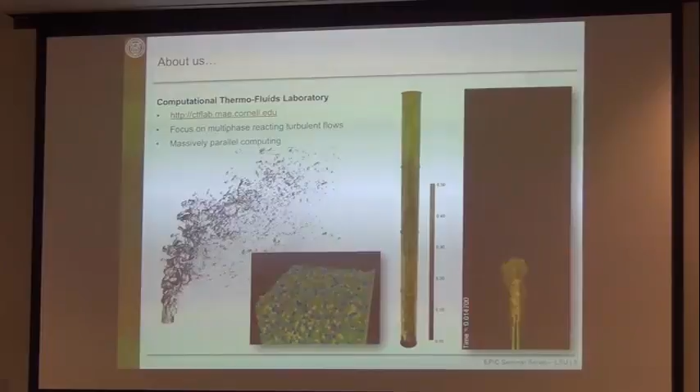A couple of things I'm not going to talk about: we do a lot of particle-laden flows. This movie, probably the most boring one, shows sand grains in water flow at the bottom of a pipe, and we're looking at the entrainment of the top of the sediment layer as the fluid moves. But we've also done a lot of work with cluster formation in risers, fluidized bed reactors, bubble formation, and things like that.

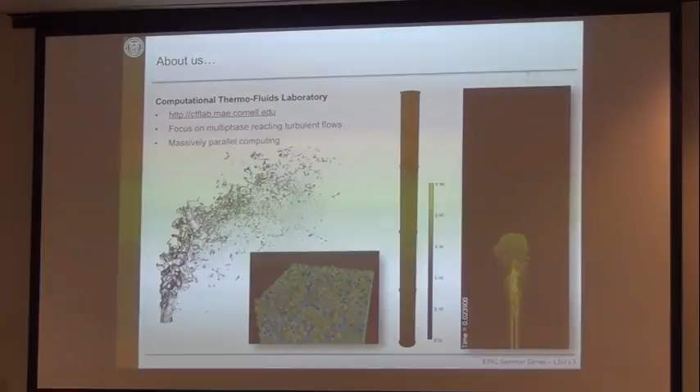This is another particle-laden flow model, even though here I'm not showing the particles. This is the riser reactor, so we're looking at two cases. In this tube, we're injecting gas at the bottom, and there are catalytic particles that are entrained with this pneumatic transport, being pushed up. When these particles encounter a certain type of biomass vapor, they convert it to another chemical species—this is called biomass vapor cracking. We're interested in looking at what happens in a system like this, where we simply have particles being pushed up by the flow, with gravity bringing them down and nothing else.

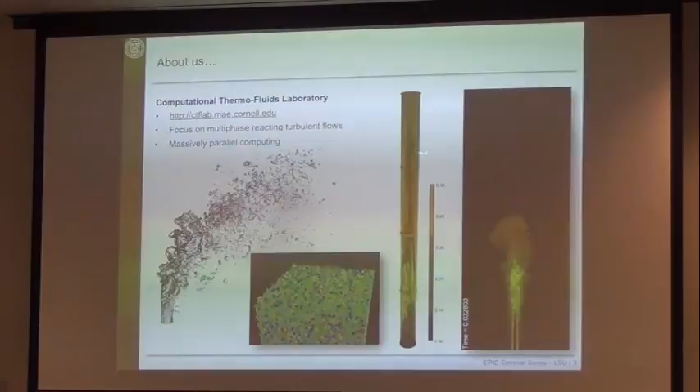What turns out is that particles tend to form clusters—they come together, form clumps, denser regions. They do that on their own; it's a spontaneous process. They start forming along the hydrodynamic boundary layers in the system, and that leads to strong instabilities, which in turn lead to very much non-trivial flows, as well as a fairly significant reduction in the conversion rates of that reactor.

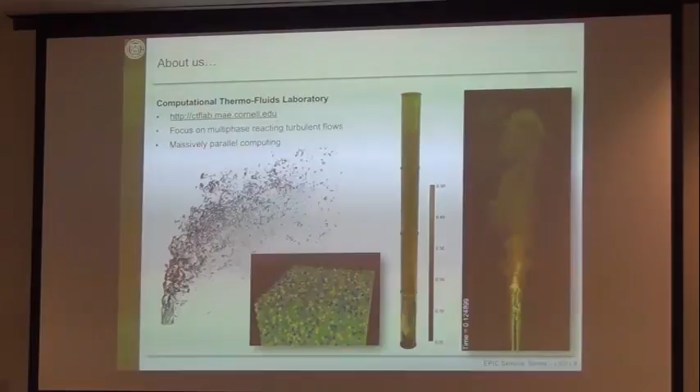And that's—we're looking here at a turbulent flame. This is a simulation of the so-called Sydney piloted jet burner. We're looking at fuel injected here in the middle; there's a pilot flame in an annular region around the jet, and then the oxidizer around it, and we're looking at the flame formations. This next thing I'm not talking about for now because we're going to cover it in a lot more detail—this is a liquid atomization process, where we're looking at a liquid jet breaking up into drops and foams.

So why are we interested in those things? Well, multiphase flows are everywhere. They're important for most industrial processes, anything that involves energy conversion, any type of conversion process, any type of manufacturing process. It's ubiquitous, it's everywhere. So that's something we need to understand.

Beyond engineering problems, it's also a very relevant process in environmental flows. For example, the turbulent two-phase flow in breaking waves is a limiting process for the rate of transfer of various quantities across the atmosphere and the ocean. If we want to model rain, we need to deal with a large collection of droplets moving in turbulent flow, coalescing, becoming large enough to eventually fall. This again is a turbulent two-phase flow process.

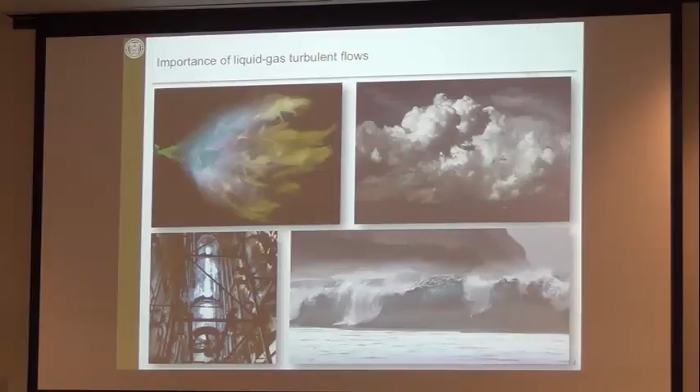So if we want to zoom in on one specific motivation, I'll use combustion as a relevant grand challenge. I'd argue that we want to improve combustion efficiency while lowering emissions, in a context where fuel flexibility is becoming more and more important.

I'm trying to illustrate this by the fact that the projected efficiency of cars all over the world is going up, while the consumption of fuel per 100 kilometers is going down everywhere, and that's driven by regulation as well as progress in understanding of systems.

At the same time, we're actively exploring alternative ways of generating usable liquid fuels. We're interested in looking at how we can convert different types of biomass products, including algae and corn stover, into a usable liquid fuel that we can then burn in our engine.

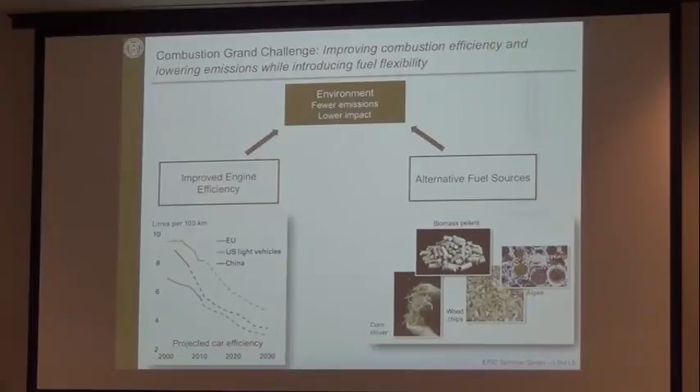All right, let's consider this a bit more. By the way, this image comes from Moin's group at Stanford. When I started my PhD, I was working on doing a large eddy simulation of that flame, so I've stayed with that image for a while, and it's been ingrained in my brain.

I'd argue that if you want to work on combustion and have a positive impact on combustion processes, at least part of the key is in the liquid-gas interaction, in the liquid atomization process. So fuel injection is critical to the system.

We have a big recirculation region here. There's a region with the flow actually going back inside. This is a very complex flow pattern - heavy, turbulent, highly multi-scale.

But it turns out we have some decent understanding of the combustion process here - we have okay models of the turbulent combustion process. When I started my PhD and ran simulations of that, I realized I could get pretty much any answer I wanted in terms of one metric: the temperature at the exit. Why is it important? Well, if the temperature is too high, we're going to burn the turbine blades, and we're not going to have a working engine.

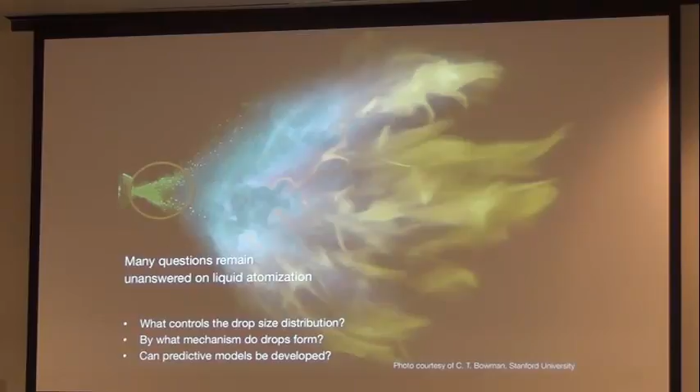If we don't know the drop size, we don't know the drop velocity, we don't know the drop distribution. We don't know how the combustion process will look, what type of soot we're going to form, or the efficiency of the system. We essentially don't know anything.

Alright, so hopefully I've convinced you that it's important to improve the way we model multi-phase processes. I'll argue, however, that this is a challenging task, and I'll make a few arguments for that.

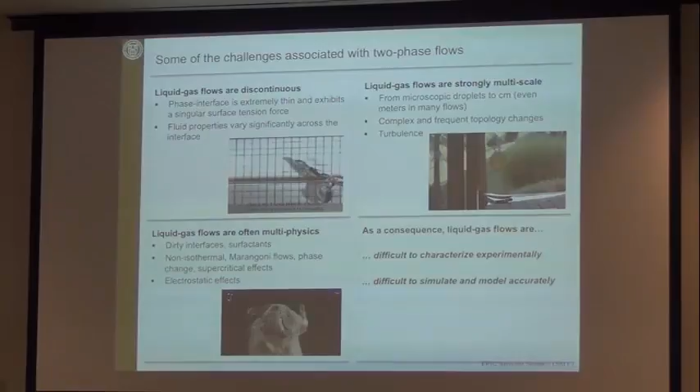One is that a liquid-gas flow is discontinuous in nature. Within our computational domain, from a computational perspective, we have to deal with an interface representing a discontinuity between the two phases. That interface is extremely thin, and for all intents and purposes of engineering flows, it's a discontinuity in our system—infinitely thin.

It leads to a surface tension force, so we have a singular force existing at the discontinuous interface, and we have to deal with density ratios across that interface of the order of 1,000. That means the stuff on one side is much heavier than the stuff on the other, and it can induce very large flows from just very minor motion.

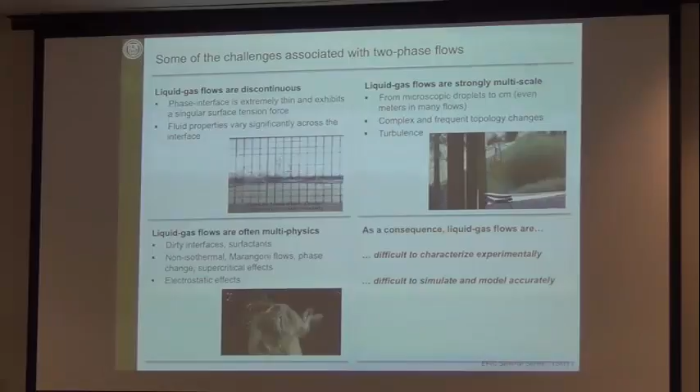We're going to have to deal with significant pressure variations when we move our liquid around.

This guy here isn't really using surface tension—it's more the difference in density. That's surface tension elsewhere. But on that scale, surface tension isn't really helping this guy float much. It's really just inertial forces that are helping.

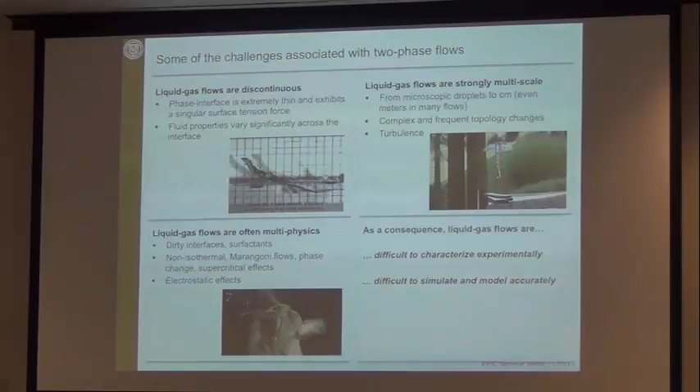For example, here we're looking at a weird configuration: one balloon creating a backward jet that forms a cool-looking helicoidal instability, which leads to a mushroom shape at the top that inflates into a little bag, undergoing bag breakup. You can imagine going from this large-scale jet coming out of that one balloon to incredibly tiny droplets, just from breaking the inflated film like that.

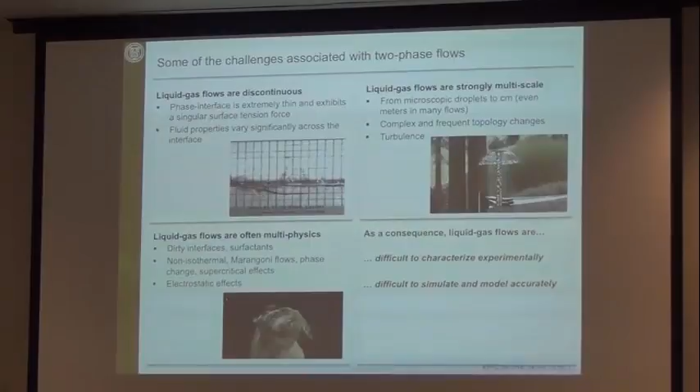This is going to be an extremely challenging problem to model, and all this is happening in a turbulent environment, which also naturally leads to many scales. Finally, another aspect is that we typically have multi-physics types of environments—so we have multi-scale, multiple phases, but also multiple types of physics.

For example, you might have to deal with dirty interfaces, the presence of surfactants. I guess this was meant to be a simplification of dirty interfaces.

We might have to deal with non-isothermal processes, Marangoni flows, phase change or supercritical effects. And one thing we'll talk about very soon is electrostatic effects. So we might have additional physics at play.

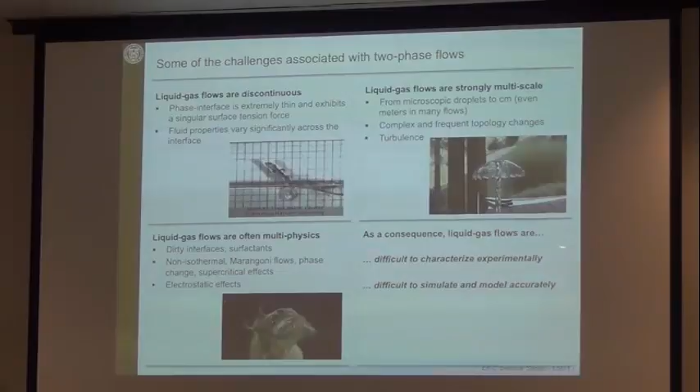As a result of all this, it's difficult to run experiments on these liquid-gas flows, especially when optimizing them. They're also difficult to model accurately.

I would argue, however, that we have the opportunity to use the growing computational resources available to us to brute force our way through this problem and use computation as a discovery tool. If we run large enough simulations, we can generate data that helps us understand what controls, what aspects of this flow are critical.

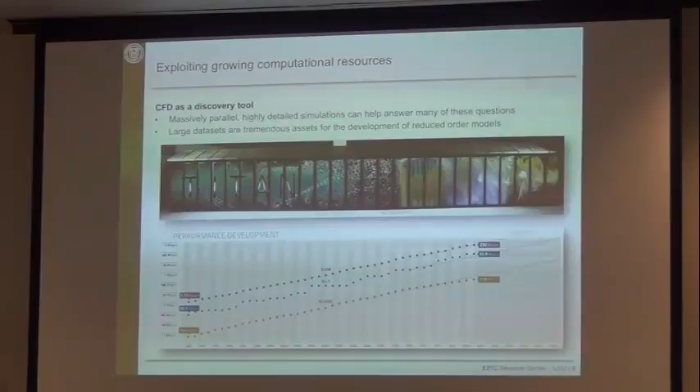We're getting to the point where it's conceivable to say, hey, well, we know the equations, we know we have these discontinuities, we know the parameters of the two fluids. Let's just solve everything. We have this chance where we actually have a complete mathematical representation of the problem at hand. Let's just come up with a solution computationally and see what we can learn from it.

And I would argue that from data sets generated in that spirit, we can help guide the development of reduced order models that could then be used in generating design data. I think this is relevant to...

Processing data. All right, so in terms of methodology, there's a lot to be said, and I had to make some choices. I thought you might not be interested in seeing too much numerics on a Friday afternoon, but I'm sorry, I'm going to still show you some numerics. So you have to be patient.

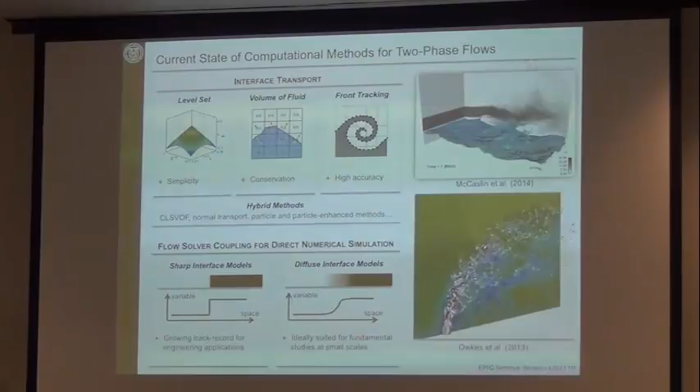But I decided to focus on one aspect that I think is kind of cool. It works out in a fairly neat way and doesn't necessarily require too much time to explain. So I'm going to focus on that and kind of ignore the rest. That's the slide where I provide a bit of context and talk a bit about the rest.

Simulating two-phase flows is something that's been around for a while. We have many methods and codes out there to do computational fluid dynamics, but most of them have been focused on single-phase flows. We want to augment that with what's necessary to deal with the presence of interfaces. I would argue there are really two key components that need to be handled.

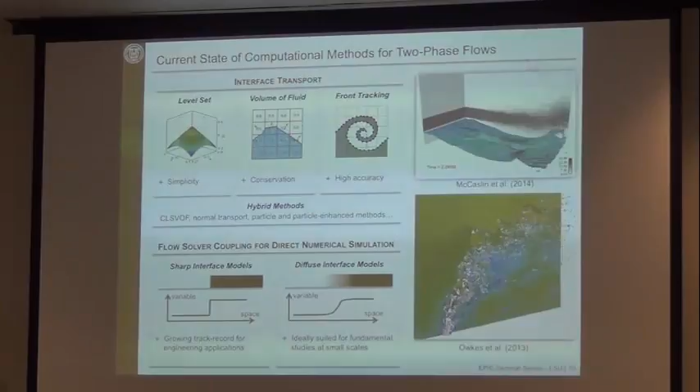One is that we need to figure out the location of the liquid-gas interface, so we need some methodology for keeping track of where we go from one phase to another. There are different methods for that. I would argue that probably the three most commonly found are what we call the level set method, the volume of fluid method, and the front tracking method.

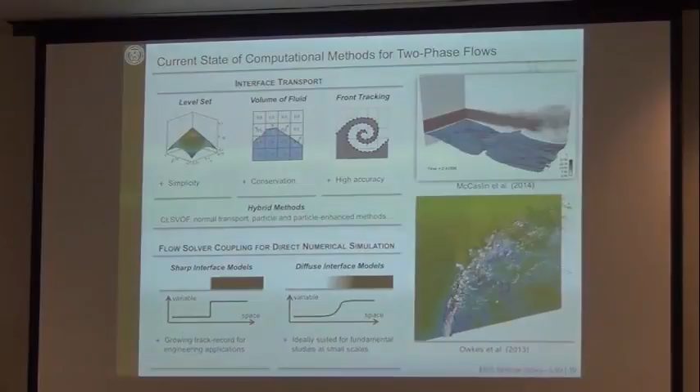The level set method introduces an auxiliary scalar field, defined such that one of its isosurfaces coincides with the interface. Then we transport that field such that the interface still coincides with that isosurface. So we're using this auxiliary function as a pure mathematical tool to help us track it.

It's a very neat method. It works really well. It's simple, at least conceptually it's simple, and in terms of implementation it's simple. It has limitations, but I decided not to focus on what I think are the limitations, because depending on what problem is of interest to you, what might seem like a limitation to me might not be a limitation to you. So I thought I would focus on what I think are the best advantages of the methods.

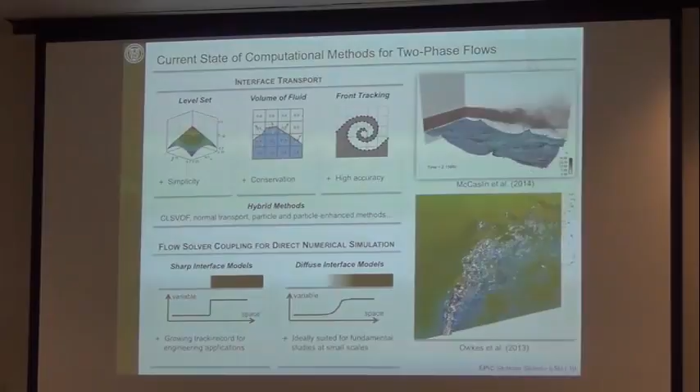You can see that I've tried to claim that this one method was not good, and I had someone in the audience who was very important and had written a paper on that, and told me that's not good. So this is, you know, from experience. I'll only focus on the positive aspects. So level set is a simple method to pick up and implement, and it works well.

Volume of fluid: the idea is you're going to keep track within each cell of how much liquid is contained in that cell. So you're going to compute what is the fraction of the cell that's contained in liquid. It might be 1 if it's 100%, 0 if it's 0%, and 0.5 if you have half your cell full of liquid.

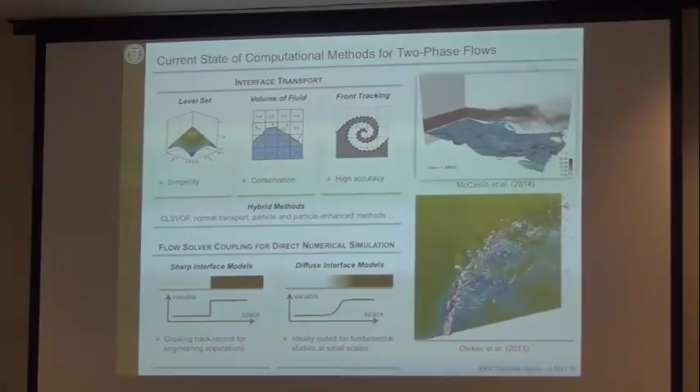The main advantage that I see in that method, in addition to the fact that it works well, is that it's naturally a method that will give you conservation. So you'll be able to write something that, strictly speaking, will conserve the amount of liquid you have. If you have a drop, you can move it around, and you're not going to see this drop shrink or grow.

Front tracking corresponds to kind of a more natural approach where you would say, I'm solving my flow equations on a mesh—typically that's what we do. Let's just introduce an additional mesh to keep track of where the liquid gas is. So we'll have a mesh on our surface and deform that mesh to keep track of where it is. It tends to be very accurate.

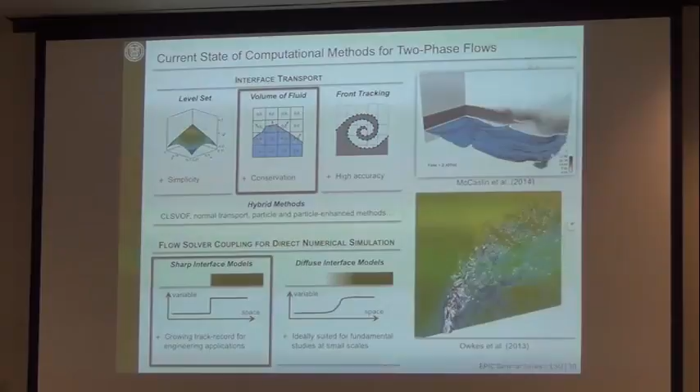So that's one aspect. For this, I'll say that we'll focus here on volume of fluid. We've done a lot of work on level sets as well. I haven't really done too much in front tracking, but here we'll talk about it.

To me, the second aspect is that we need some way of telling a flow solver that there is an interface at a certain location, and that interface leads to a discontinuous density, discontinuous viscosity, discontinuous pressure, etc. So we need some way of telling our flow solver that it's actually solving two different equations across interfaces.

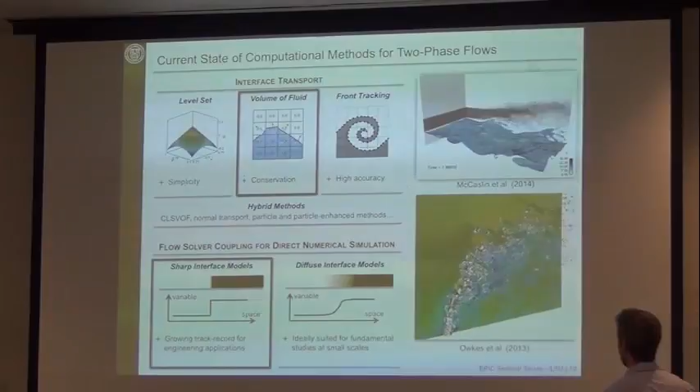A lot of people, maybe 20 years ago, were really focusing on: diffuse interface models, where we have a smooth transition from one phase to the other, which is an acceptable approach provided you can say something small about what this diffuse region means, knowing that the two phases are typically immiscible. More recently, we've seen sharp interface models being proposed where we have true discontinuities within our flow. And here, this is what we're going to focus on.

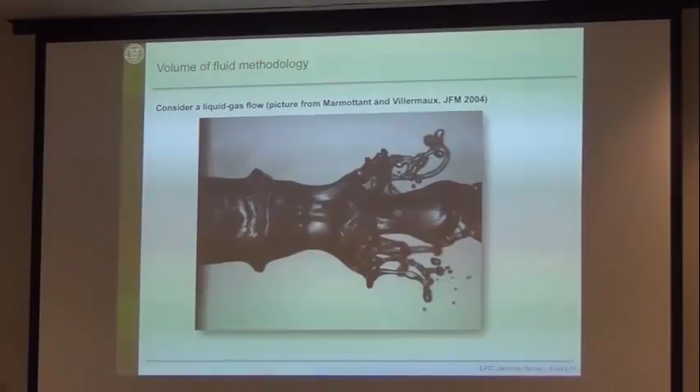All right, so I thought we should start, since I'm going to show you a little bit of numerics, from the very basic idea to make sure that everyone follows.

We're going to start with a really cool looking image of a liquid gas flow. That's probably one of the most well-known images of an atomization process out there. This was published 12 years ago, coming from France, from a guy called Philippe Marmottant, who spent his PhD taking really cool pictures like that.

So this shows a liquid water flow. It's a round jet going from left to right. And around it, there's a very thin annular co-flow of gas that's fairly high speed in comparison. So this is moving slowly, and around it, as you can see, there's an airflow that's pretty fast.

This leads to the development of a streamwise instability that, for those of you who are well versed in fluid mechanics, we'd say is a Kelvin-Helmholtz type instability. After that, we end up developing radial instability. So you see the development of those ligaments and this crest becomes uneven.

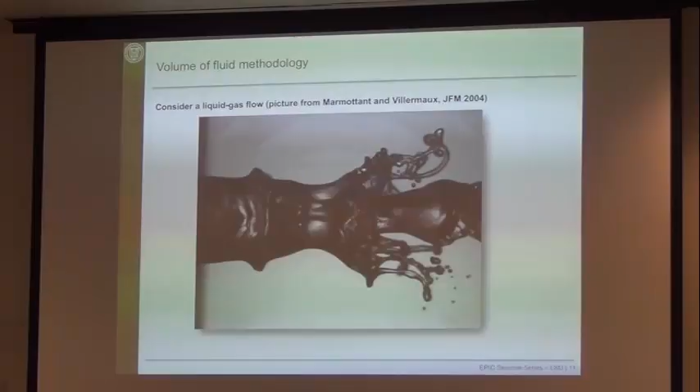This other picture from the side I didn't show. This is due to radial instability, and then you start pulling ligaments because they have to surround the gas flow. And those break due to a Rayleigh-Plateau instability. But that's just a very pretty picture.

Let's make it good. So if we have in our computational domain a region that's liquid and a region that's gas, we're going to simply define the liquid distribution function, the function that tells us an indication of whether we're liquid or gas. That's simply a function that's a Heaviside type distribution.

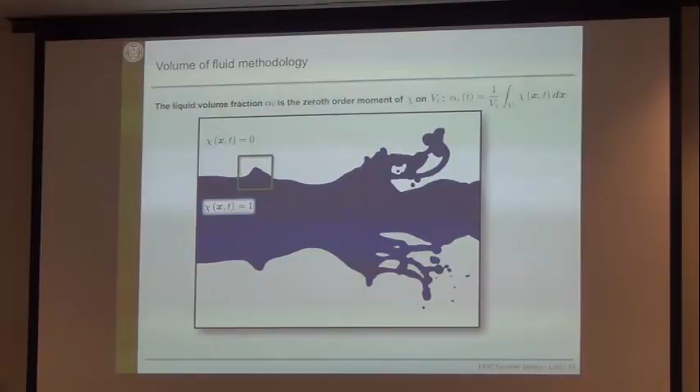That's not something that's very convenient for us to use because it's a distribution—not convenient as a smooth function to work with. So we're going to say that if we have a computational cell here, we acknowledge the fact that it contains a region that's gas and a region that's liquid, and we're going to simply worry about the zeroth-order moment of that distribution function within that cell. So we're going to simply volume average it over our computational cell.

And we're going to call that alpha in cell i at time t. And we're going to say that this is simply our liquid volume fraction. So that's the volume average of this liquid distribution function.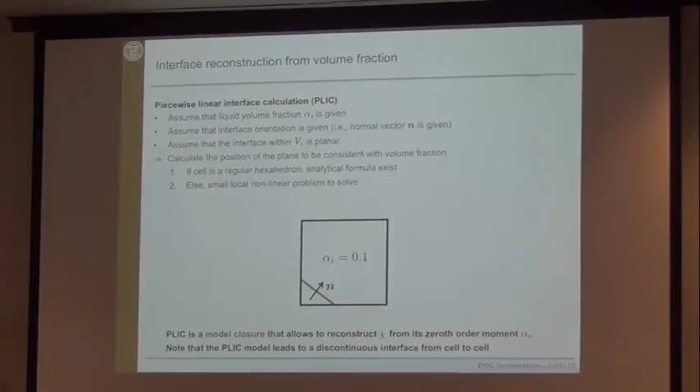Now, from that information, you might say, haven't we given up a lot? And yes, we've given up pretty much all knowledge of the distribution of liquid, except on a cell-to-cell basis. But within the cell, we've lost all the information. So we're going to need to make an attempt at recovering some of that information.

So this takes the form of what we call a piecewise linear interface calculation. This was proposed a number of years ago. I'm just presenting other people's work here.

The idea is we're going to assume, in a cell, that we've obtained from the solution of our equation how much liquid we have. And in addition, and that's kind of a stretch—I'm skipping a number of things there—assume you also know the orientation of the interface. That's a tricky question.

But I'll argue it's possible to obtain an idea of the interface orientation if you have enough information about the volume fraction in the surrounding area around the cell. So, looking at the volume fraction and normal orientation, we'll assume the interface within our cell is planar. From that, it's sufficient to solve this as a purely geometric problem: we compute where this interface should be located such that it is perpendicular to this normal vector and such that the volume under this interface integrates to the correct fraction of the total volume available.

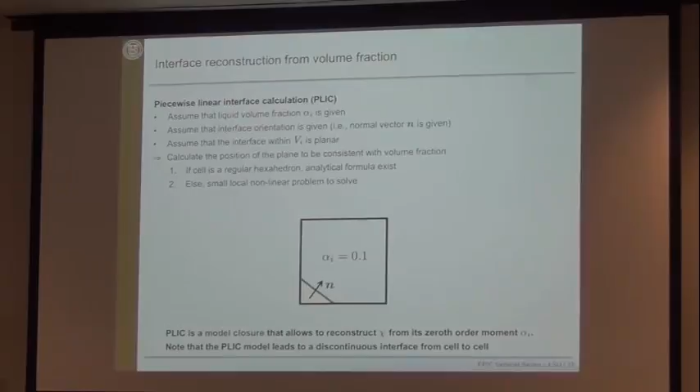That's easy to do, and it's analytical if you're working with an exact, simple cell. If you're working with a computational cell that's more complex, it's not analytical—it's more complicated—but it's still a nonlinear problem that's very small, and we can solve it iteratively to obtain a solution.

So you can think of this as a model closure that allows us, within this cell, to take the zero-order moment information—our volume fraction field alpha—and reconstruct from it the internal distribution of the interface. The big issue is that this representation, in the form of a little chunk of line, is discontinuous. From cell to cell we have these little chunks that don't nicely connect.

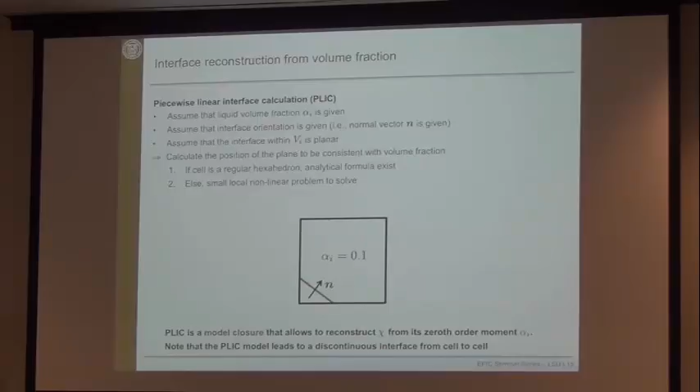How do you transport a volume fraction? Well, it turns out a volume fraction is a discontinuous quantity, and transporting a discontinuous quantity is problematic. If we just use naive methods, some kind of simple scheme, we'll diffuse it out and won't maintain this discontinuous nature—we'll end up with a bunch of cells where we don't know how much liquid or gas we have, just some mixture of both.

If we use a high-order scheme, we can maintain the discontinuous nature a lot better, but then we'll overshoot and undershoot, creating regions with more than 100% liquid or less than 0% liquid, which isn't convenient. So instead we propose an alternative, geometric in nature approach. First, I'll recast the problem as a simple advection problem.

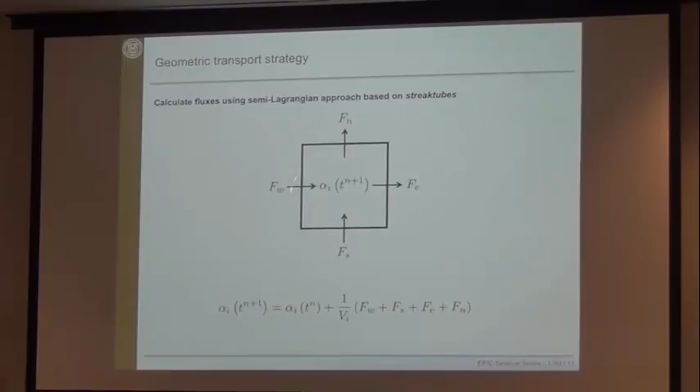Let's say I want to know what alpha is in that cell at time t plus 1. I'd argue I simply need to figure out how much is fluxing in and out of each cell. Then I can obtain the new volume fraction from the knowledge of the old volume fraction and how much liquid has left or entered the cell.

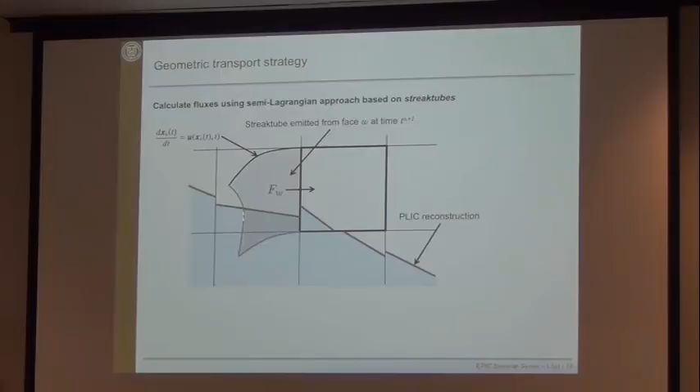So we'll take a cell, take the cell face, and in a geometric sense emit what we call a streak tube. We take that face and move it back in time to where, in a Lagrangian sense, if it were a fluid particle, it would have been in the past, such that this line over our time step deforms into that straight line.

So I've created a flux tube that corresponds to the volume swept by fluid molecules crossing that cell face during the time step. Now that I have this tube, the other thing I need is to figure out how much liquid is in it, which I can compute because I have a PLIC reconstruction of the interface. If I know how much liquid is in that tube, I know exactly how much liquid is entering through that face.

So that's the equation we're going to follow—the equation followed by this little point is just a pure Lagrangian equation. I'm taking that point and moving it back in time according to the flow velocity. So that's the step we need to do. And how do I generate the geometry of this?

Well, it turns out this is not a particularly new idea—people have been looking at this for a while. It started 40 years ago.

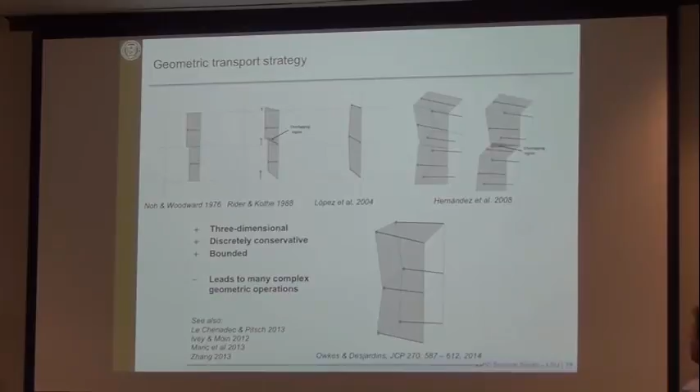Where people said, well, if we can get a 1D approximation of our streak tube, that would be great. So they just took their face and moved it back in time in the direction normal to the face, and looked at the volume swept and how much liquid was in the tube. That was easy to implement.

It worked terribly. People then realized we need to account for the fact that the flow doesn't go normally through the face—it actually has an angle, going in whatever direction the flow is going. So they accounted for the fact that those volumes had to be inclined, but then generated this in a way that neighboring streak tubes could overlap.

If you're overlapping streak tubes, you end up with a region of the flow that gets fluxed twice—once above through the face at the top, once below through the face at the bottom. You're not going to be conservative if you do that. That doesn't work well either.

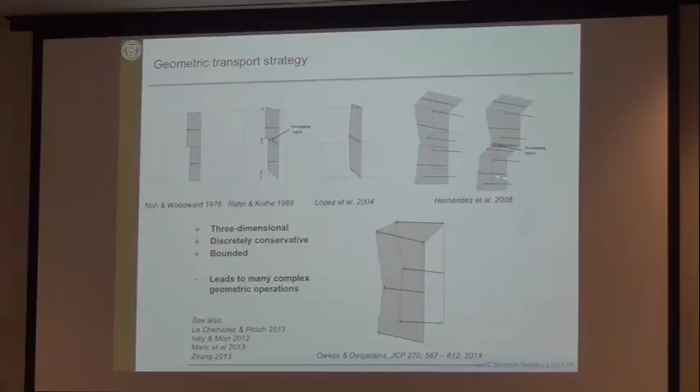People realized that and fixed it in 2D. Then they said, all right, we're going to need to fix that to plug that in 3D. And we realized, well, it's complicated—so we'll now get some overlap between streak tubes that are connected through their corners. So again, this is not preserved.

So what Mark a few years ago did was say, well, let's just wipe the slate. Let's simply take our cell vertices and those corner points and make sure they move consistently, no matter what streak tube they're part of. They need to essentially remap those cell faces into, in a Lagrangian sense, what they would have looked like in the past had they been an actual material fluid surface.

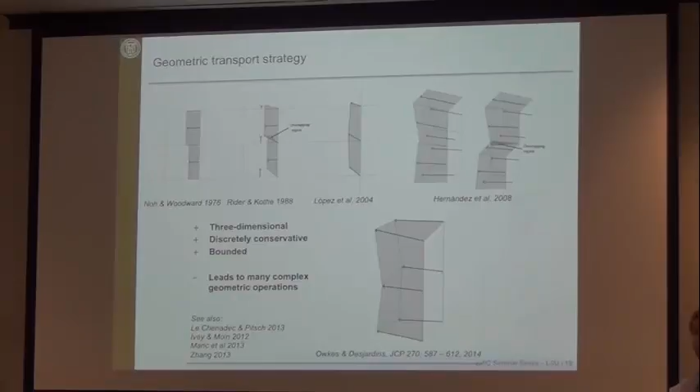And then that's going to give us our usable stream tube. In 3D, that can be made discretely conservative—I would argue it is not inherently discretely conservative, but it can be modified to be so. It also has the advantage of being bounded, so we'll never get more than 100% liquid or less than 0% liquid. So it has a number of advantages, but it's pretty complicated.

Why is that? Well, here's a naive idea of what this would look like. You just take this space and bring it back in time, and it looks almost like a cube—everything is easy. But in real life, this point could be moving to the right, this point to the left, this point to the left, this point to the right, such that this might be the shape the stream tube takes. You'll have crossed geometries and negative volumes, and it's going to be a mess.

So we need a way of dealing with it. It turns out that's not particularly complicated, so I'll just focus on one example to show you this. If we stick to 2D, and I label my face AB, let's say the generated stream tube in this very simple configuration is ABCD.

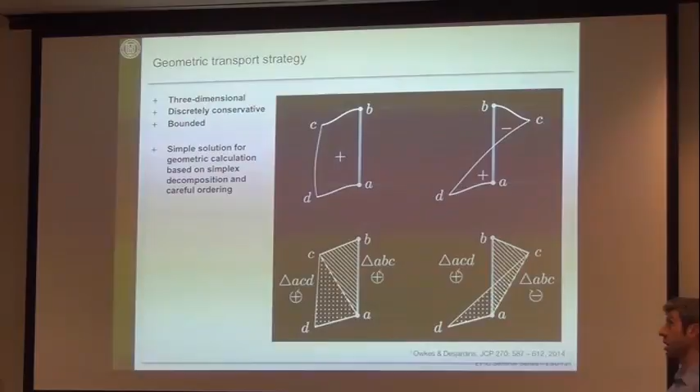We're just going to do two things. First, we're going to break it—we'll assume all lines are straight lines, dealing with a purely linear representation of all that, which should give us second order accuracy. In addition, we're going to deal only with simplices. A simplex in 2D is a triangle, so we'll represent our stream tube as a collection of triangles. Those are the constraints we're giving ourselves: straight lines, triangles.

So that's good. Now if we go to that configuration where C has moved to the right and D to the left, that's the configuration we get. A,B,C, according to the right-hand rule, is now a negative object. A,C,D is still a positive object, and it appears to double count this region that should not be part of our fluxing volume, yet it's covered by both triangles—once with a plus, once with a minus.

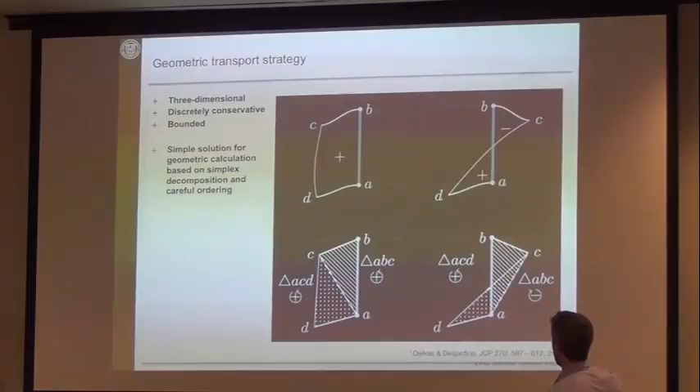We're double counting, but canceling those errors, we end up with a very simple representation that lets us say that the part limited by this line has moved with a minus sign—going to the left of the face—and the part here is assigned a plus sign, going to the right. We've successfully, with second order accuracy, dealt with a representation of flow in and out and simultaneous flow of events.

Quick clarification: these schemes, are you storing the velocities at the corner points? We are bringing our velocities to the corner points, but the scheme we use is staggered. We have velocity at the faces, the center of the faces. That's typically where we store it, but through interpolation we can bring it to the corners. We're going after second order accuracy and conservation, so interpolation is not an issue. The interpolated velocity is what's used in the calculation of the stream tubes.

I would argue that this looks like a simple example. It turns out this idea of taking a complex arbitrary stream tube, breaking it into simplices—in 3D that would be tetrahedra—and then specifying a unique, well-chosen order for the points to define the sign for those objects, is sufficient to deal with all possible complex, overlapping, crossing geometries. That's what we've done, and the conclusion is that it works well. I'm not going to use that too much.

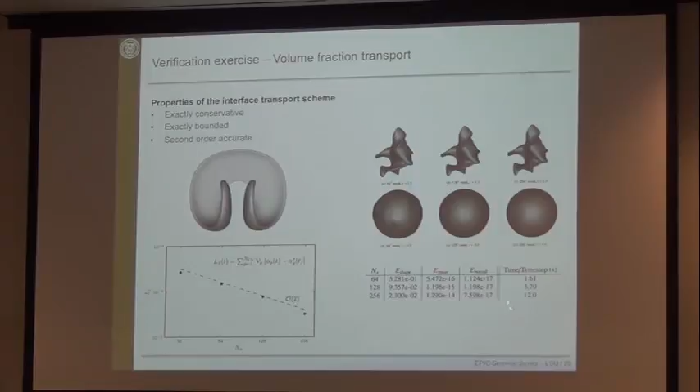I won't go into much more detail with the scheme, but once you've created that, you know how much liquid you have at the beginning of the time step, how much you have at the end, and how much went through each face. You can combine this to build a conservative transport scheme for any other quantity that's discontinuous because of the presence of the interface. So you can transport momentum of the fluid, which is discontinuous, in the same way. You can transport a scalar that only exists in the liquid, not in the gas—a concentration of something in the liquid—in a way that's conservative, even though your mesh is being cut arbitrarily. You can be second order accurate and conservative for any other type of transport.

Here's an example that's a fully chosen representation of that. This is a circle being transported in a domain, and we're tying a scalar to that circle, assigning it a Gaussian distribution. So we have a scalar field that's a Gaussian being moved around and diffusing as well, as we move the circle. We have an exact solution for it, and this is again another conservation test.

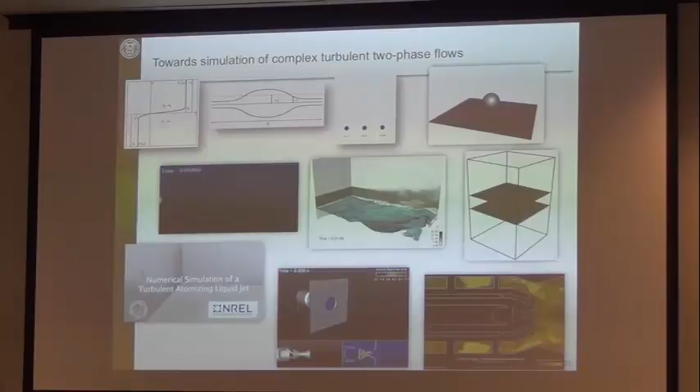So this is usually where the computer practice... let's see if it makes it through. Yeah, all right.

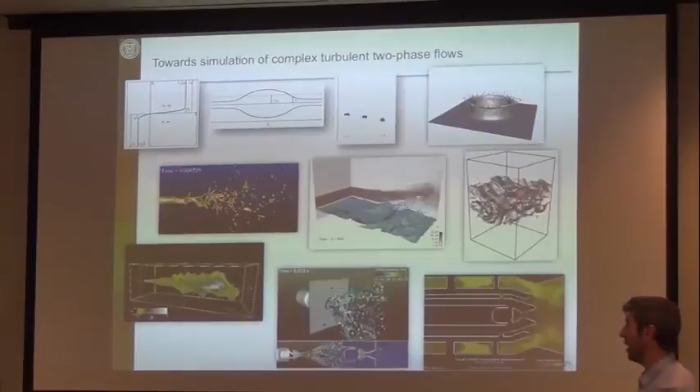We've used this to study a number of configurations, organized here by increasing complexity. We've looked at a simple velocity shear interface, various instabilities and the formation and breakup of ligaments, rising bubbles, milk crown formation, and the turbulent planar jet. This is an air-liquid configuration, where a liquid layer is being atomized by a high-speed gas flow running on top of it.

The timing for this one is good—we've looked at the simple round jet of liquid into quiescent gas. This is probably one of the biggest simulations we've ever done, a couple of billion cells run on 12,000 cores. So we've looked at the atomization process of this.

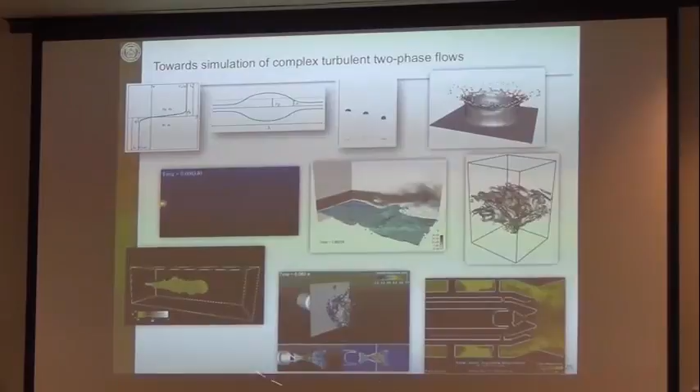We've added to these ideas embedded boundaries so we could look at a complex injector. Here we're looking at a swirl atomizer, where you get the formation of an air core in the center of the swirl atomizer—liquid is spinning and gas is re-entering from the middle. Then we went all the way up to a realistic General Electric injector, shown here. I don't even think you can see the interface in this, but there's also a pressure swirl injector.

Okay, very good question. Breakup is inherently modeled through opportune numerical errors, that's the truth of it. When we don't have enough resolution, we see topology changes because our representation is based on figuring out how much liquid is contained in our cells. This is volume of fluid, and so I would argue that the piecewise interface reconstruction that assumes we have a single plane interface in each cell is our breakup model.

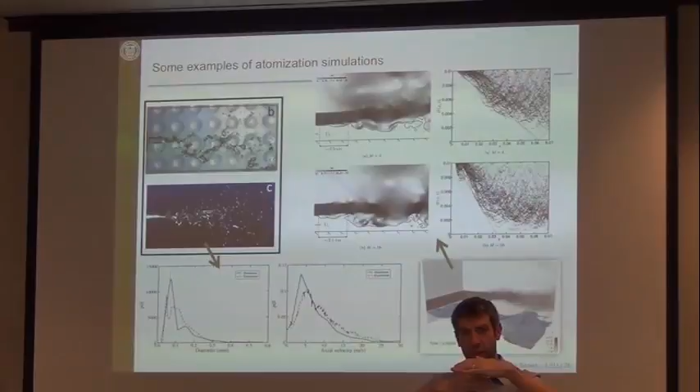If we don't have enough liquid and our normal is poorly calculated, imagine if I have two interfaces that come close together - the reconstruction is simply wrong. We should have two interfaces represented in the cell. We don't do that. Instead, we typically put a single one, and we'll put it perpendicular.

This very complex, weird-looking balloon that was breaking into this umbrella-shaped thing - those technologies are going to be very poor at simulating it. So it works for 3D, but it doesn't actually work for 2D.

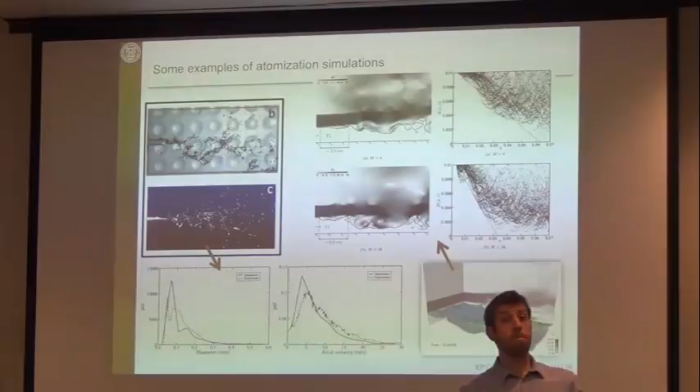Yeah, 2D is problematic because 2D doesn't have an inherent process that accelerates the breakup. If you have a 3D ligament, pulling of that ligament will give rise to the so-called Rayleigh-Plateau instability that will exponentially increase the rate at which the liquid is being pulled. As a result, it doesn't really matter how much we resolve, we'll get the same answer. Past a certain level of resolution, our breakup process becomes independent of resolution. Because of that, we can break up a ligament with reasonable confidence, but we can't really break up a film with confidence.

That's really an excellent question. There's still a lot of work that would have to be performed to deal with film draining. Not a lot of people have looked at how to model that in the context of those types of simulations.

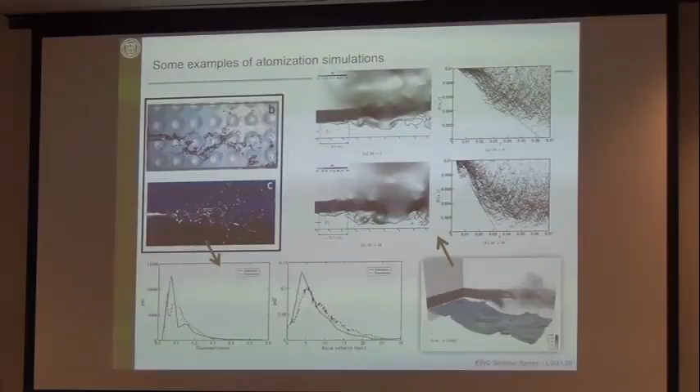All right, so let me skip some of that. This is some example of validation. We've looked at historical data for some of those simulations - hopefully you can see that qualitatively those things look very similar. We've looked at drop size distributions, we've looked at penetration. We have looked at very relevant flows for a different purpose.

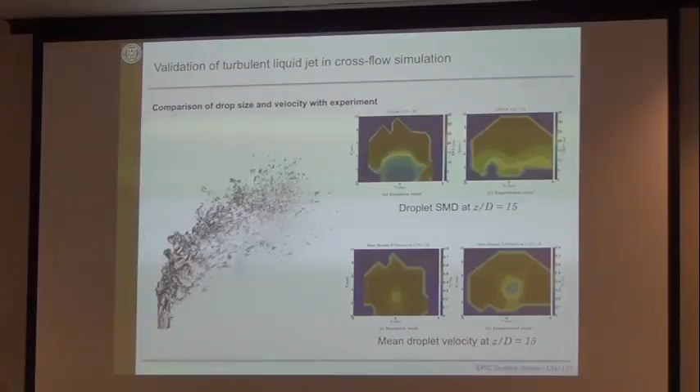And that is the case of the liquid jet in cross flow. Here we have a cross flow going from left to right, and we're injecting liquid into the system. The liquid is bending, breaking, forming wing drops. We've compared, at 15 diameters here, the drop velocity as well as the so-called SMD, Sauter mean diameter, a measure of the mean diameter. As you can see, it works - it's not perfect, but there's also a lot of uncertainty with experimental data, so we're kind of happy to simply be on the same color scheme. We're excited to see that.

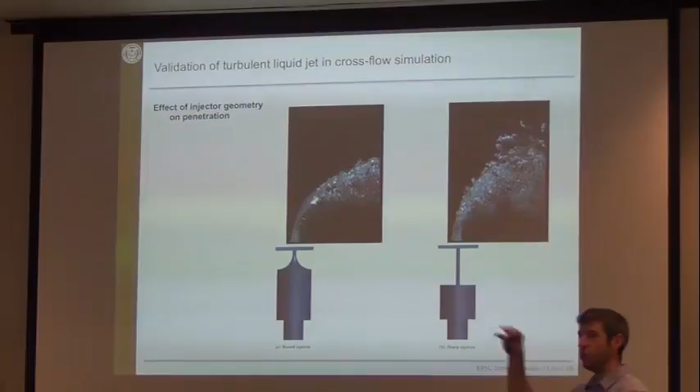For a more easy thing for us to look at, we've changed the shape of the nozzle used to inject the liquid, and we've been able to compare the penetration of the liquid. This nozzle tends to favor a laminar jet, at least initially, and the red line here is the experimental measured penetration - we're reasonably close to that. In the turbulent case, the jet comes out turbulent, it has more turbulent kinetic energy, it's more capable of penetrating, it tends to go straighter. We're also reasonably well following the experimental trajectory of penetration.

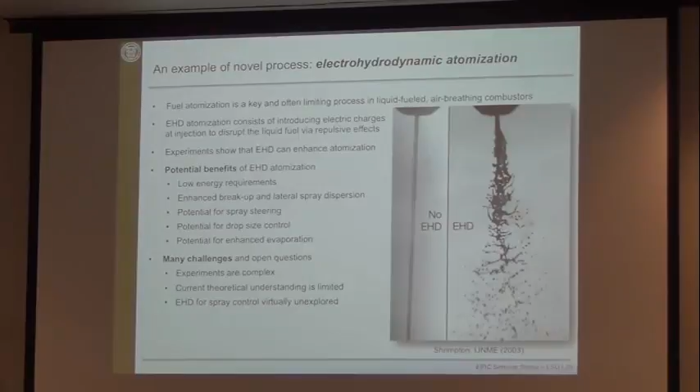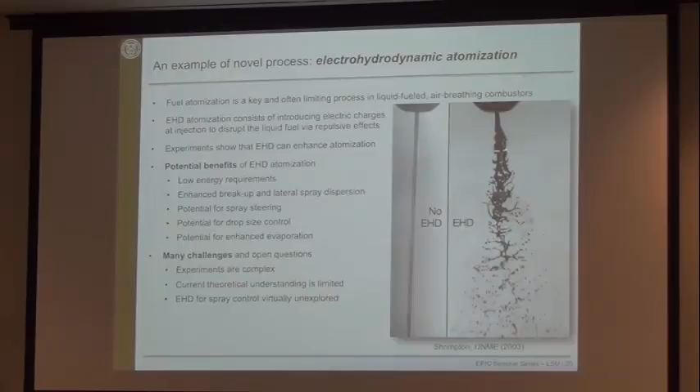I wanted to show something about electrohydrodynamic atomization. I've talked about modeling novel processes - there's nothing novel about it, some people have been injecting fuel for a long time. But starting here, we're starting to look at novel processes. People have started thinking about what would happen if you were to inject electric charges within the liquid in order to use the natural repulsion within the liquid to help break up this liquid. That's called EHD atomization. People have shown that if you have a kerosene jet at low velocity, you won't see any breakup - that's actually with kerosene. But if you introduce charges, you can see breakup. The charge experimentally makes it happen.

We are able to show—this movie is a bit disappointing because it's very short—but the uncharged case, even in the presence of turbulence, which was not present in the picture I showed, doesn't show any breakup. It would happen probably further downstream. But the charged case here does show breakup.

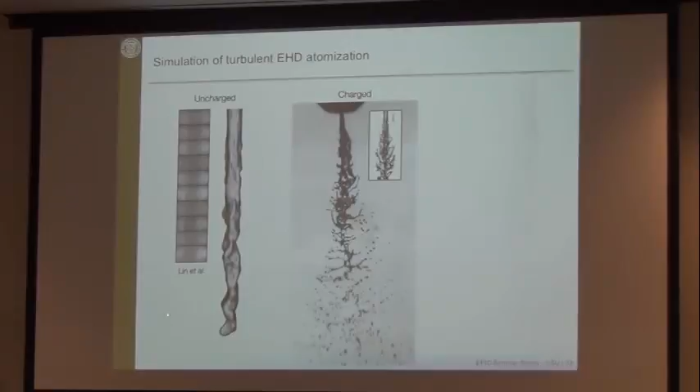The charged conditions now, we have experiments for that, we have some data, and we have some current data that we have also in photographs. If we build a simulation domain to the scale, we can see that it seems that at least the cone angle that starts from here kind of corresponds.

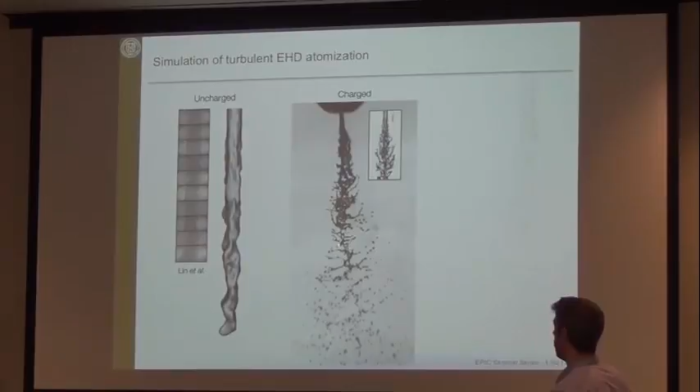The onset of the opening of the thing does seem to kind of correspond. The predominance of outward radially oriented ligaments also seems to correspond kind of with what we're saying. So we're pretty excited to see that there's at least some correspondence between the two.

The other thing, though, is that we can say lots about the very detail of the structure. For example, we can say where the charges are located. The charges are bound to drift within the simulation. They will move towards the surface. If you give it enough time, they will all be at the surface.

Turns out that's true, but it's way too fast—they will not have time to relax at the surface. So we'll end up with drops outside that will have slightly larger charge concentration, and an inner core that will have somewhat lower charge concentration.

If we want to use the presence of the charges to help us steer the spray through external control, for example, which is something that we're starting to look at, we will need to know how much charge is contained in the drop. So that's something that we're really excited about, and that's certainly a novel process.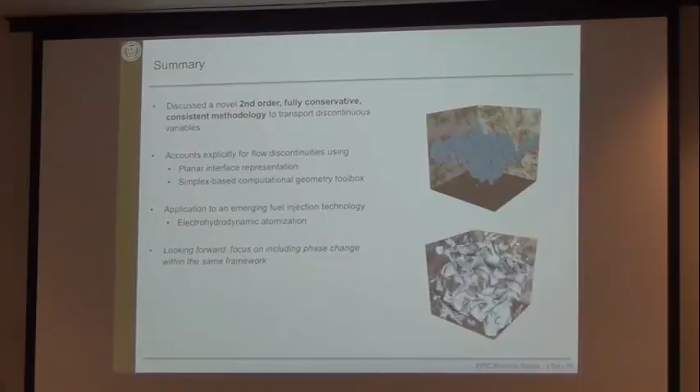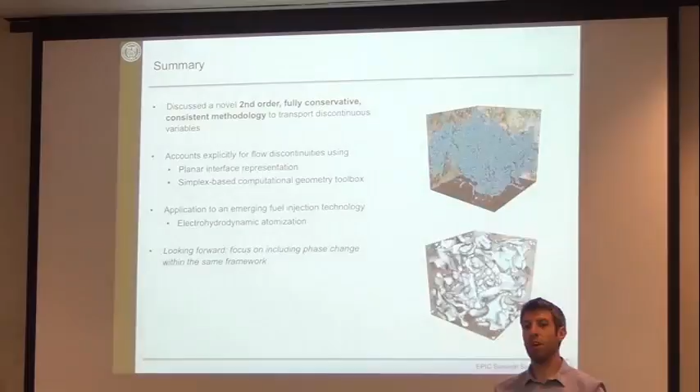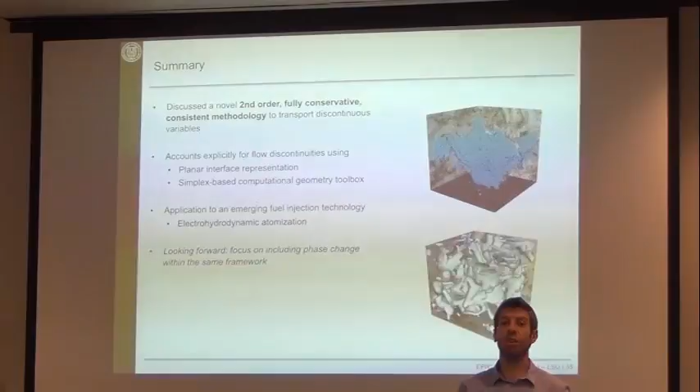You could say, well, breakup has happened, but since we're not capturing it on proper scales, we should use a model that tells us what we expect locally the drop size distribution should be. So you could really think of, for example, doing field modeling, where once you fall below resolution, instead of just breaking the interface, you give up on PLIC.

You say, well, I'm not resolving locally, I need another representation of my interface, maybe in the form of droplets, many droplets. And suddenly you would be able to do something like that, maybe with more confidence. So yeah, I agree, I think there's an opportunity for modeling.

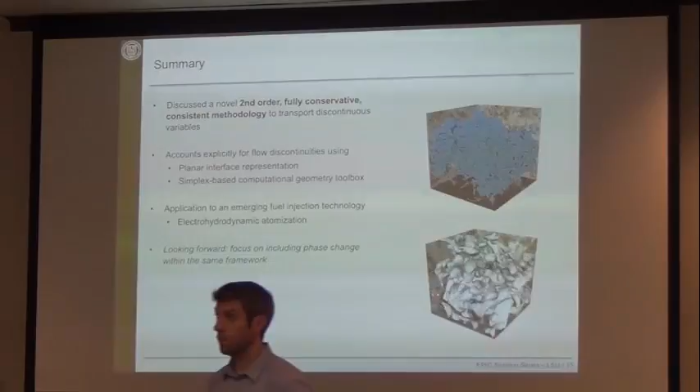So that's kind of actually my very last point here. We're actively working on adding phase change to our models. We already have the combustion capability in our computational framework, so we know how to burn stuff in the gas phase, and we know how to atomize, and that's done within the same code.

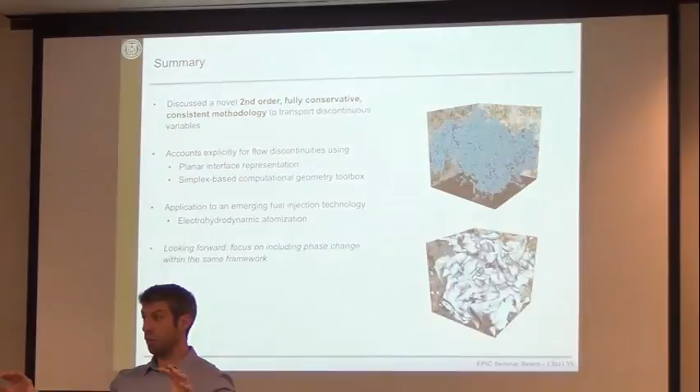We're working on dealing with phase change, so allowing for the interface to receive mass to be transferred across the interface to the other phase, and then we'd like to actually burn those drops. I think we should be able to do that within the same code.

Well, under heavy assumptions, so we're doing low enough Reynolds numbers, we're doing low enough Weber numbers for conditions that are easy enough. I think we can trust what we're doing reasonably well.

We're still actively working on validating. I haven't shown a lot of validation. I guess I skipped through a number of validation slides. We are working with experimentalists to try to do more validation.

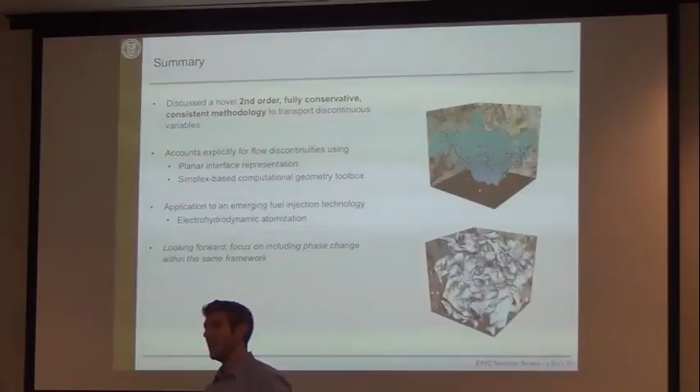It's difficult to find good atomization data sets because experimentalists naturally will tend to work in conditions that are ambient pressure with water and air, which leads to high density ratios. Those high density ratios have nothing to do with the atomization processes that we see in pressurized environments. So it's difficult to really do detailed validation knowing the presence of this huge gap.

But we work with what we can. So we do compare drop sizes coming out of water atomizing.

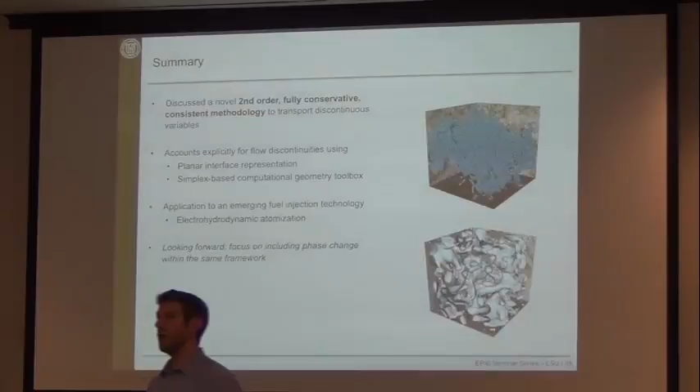If it's too high, we cannot. We need models that would have to be knowledgeable about the physics of turbulence around interfaces. That's what we're working on heavily. That doesn't really exist yet, so we're still working toward this problem.

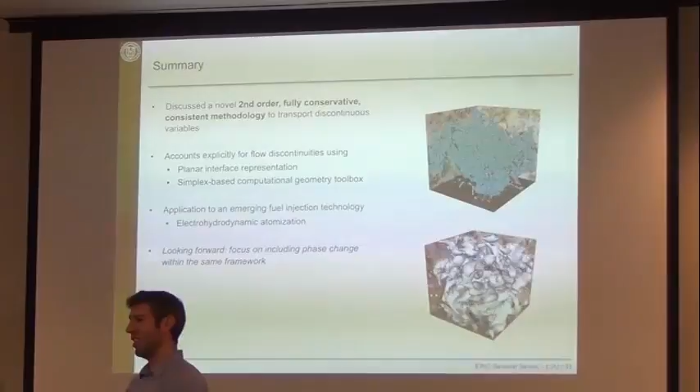Right. One last question.

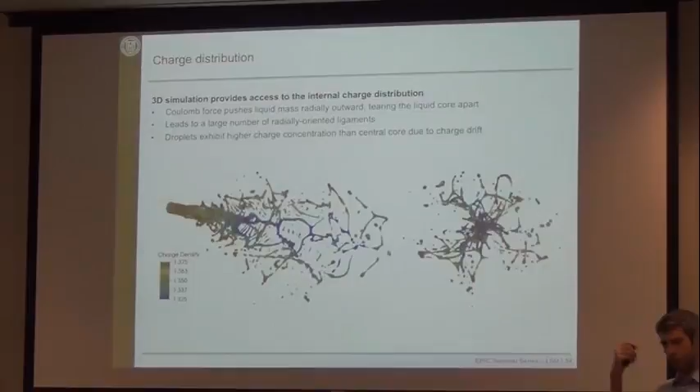We have some knowledge. So the guy who did the experiment is called Trevor, he's in the UK, and has published some really cool stuff. Their injector is complex, so they have a charge injection system.

The outer rim of the injector has a certain potential, and then we have a needle which is at a different potential. This is a very small injector, you don't need a huge power to generate enormous electric fields. That leads to charge transfer from the needle to the liquid.

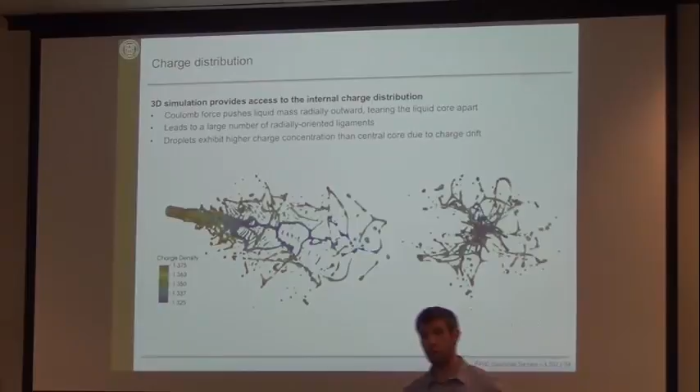There's no... we're assuming that there's no charge transfer in the gas. Charge is redistributed within the filaments, both because of the fluid mechanics but also because of the electrostatics. Correct. So we have drift with respect to the surrounding uncharged fluid molecules, and we also have simple transport. By far, the drift is minimal compared to the convection through fluid mechanics.

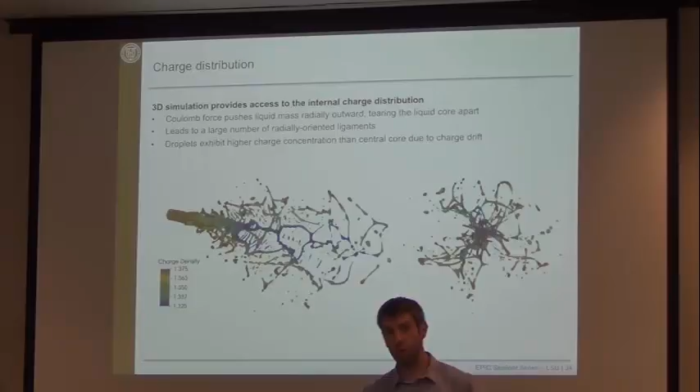And then what we have is a discontinuity of the permittivity between the liquid and the gas, which leads to the development of an electric stress at the interface, which leads to an additional pressure jump that adds to the surface tension driven pressure jump. So there's some non-trivial mechanics at play here.

The filament structure is driven basically by the charge at the two ends. Yeah, so we don't see those radial ligaments in any other simulation. So we think that this structure here is just because those structures have been pulled away from one another, and that force leads to this just breaking apart.

Which turbulence model do you use? I'm sorry, which turbulence model? There's no turbulence model. This is direct... we're resolving all scales.

And how many mesh cells? This is not huge, the Reynolds number here is fairly low, this is a couple thousand. The Reynolds number is a couple thousand, I think, for the jet. So this is, I believe, 60 million cells.

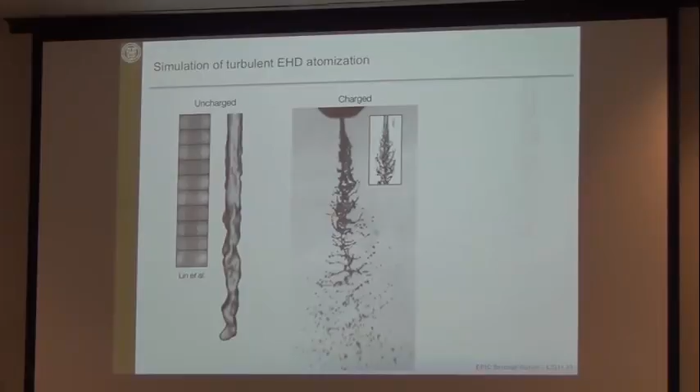No, maybe 30. Well, I think it's this is 512 by 256 by 256, which would be 30 million cells. So it's a reasonably small simulation compared to, for example, this liquid jet process I showed, which was a couple of billion cells.

So we're just brute forcing our way through that. We have a scalable code, we can run on 10, 20, 30, 50,000 cores. So we request the time, and then we don't worry too much about it. We're simply using resources and seeing. So we're kind of avoiding the issue.